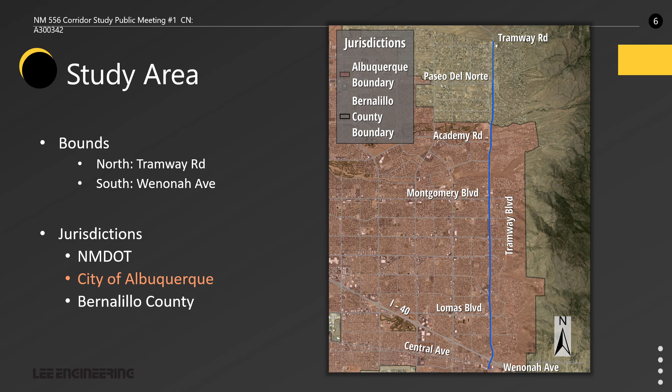So I'll be speaking tonight about the environmental clearance for the project. That's all driven by the National Environmental Policy Act, or NEPA, which is a very common acronym. So NEPA, in a very general sense, requires agencies to consider and then demonstrate and document that they ultimately identified a recommendation or a project that best avoids and minimizes environmental impacts and mitigates those impacts that cannot be avoided, while still meeting the need for a specific project. And it's defining that need for the Tramway corridor that we're here tonight to discuss.

So the general steps in the overall NEPA process are to initiate a study and develop a project purpose and need statement, then decide on a class of action. That could be a categorical exclusion, an environmental assessment, or an environmental impact statement. All three of those classes have a very similar level of environmental analysis that goes into them, but the level of documentation and processing differs among those, with a categorical exclusion being the most streamlined and an environmental impact statement being the most complex.

Then we complete all of the environmental analyses needed to identify all the environmental considerations and determine if there is an impact or not from the project and mitigate all of those concerns. And throughout the entire process, we will have a strong public involvement component, and we're initiating that process tonight. Ultimately, we get to a decision document, which is an authorization for a project to proceed to things like final design and construction.

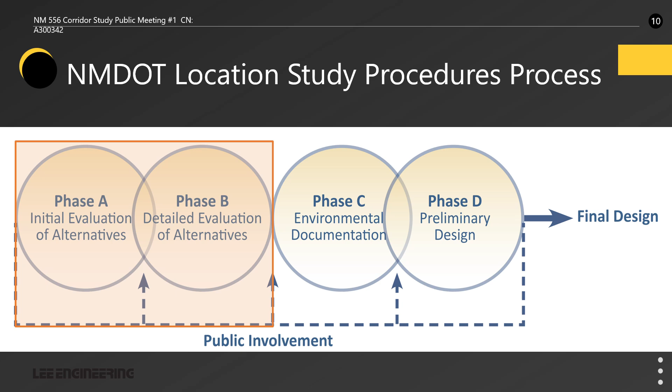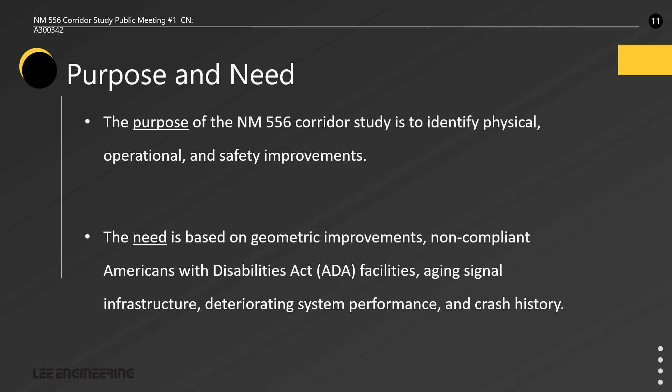The purpose for the New Mexico 556 corridor study is to identify physical, operational, and safety improvement needs. The needs are based on various geometric challenges at the intersections, non-compliant Americans with Disabilities Act facilities, aging signal infrastructure, deteriorating system performance. What we really mean by that is traffic, how difficult it is to get through an intersection during rush hour. And then of course crash history, which relates to safety throughout the corridor.

Looking ahead, after including the comments from this meeting, we will advance into alternative analyses, create a draft report late this winter. We will revisit this group with a public meeting, most likely early spring, and a final report to follow.

Now a bit on the study background. Tramway Boulevard has a rich history. It should be self-explanatory that the roadway started in the 50s and 60s as a planned access to the Sandia Peak Tram projects. At that point, it was a 2-lane road. In the 90s, it was widened to the 4-lane divided general layout that you see today. With that, the infrastructure is approaching 30 years old and has some opportunities to be improved. Also of note on the history of this corridor, in 2021, there were a few striping changes, mostly around the free right turns and acceleration lanes while entering Tramway from the side streets.

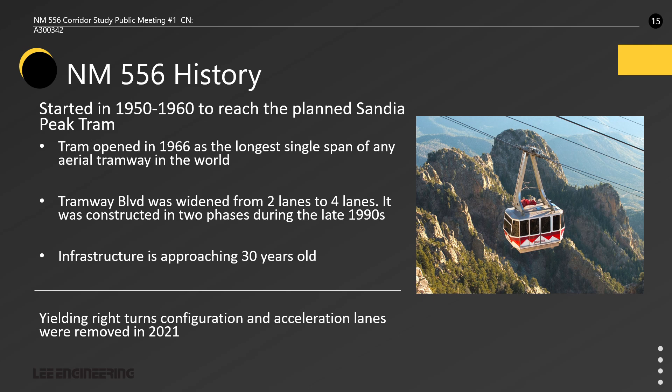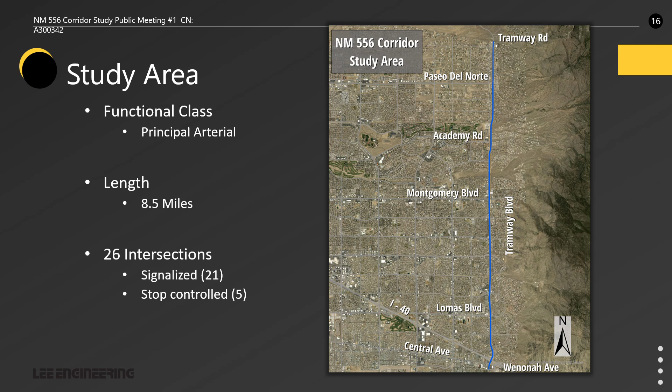Expanding on the study area, the functional class of this roadway is a principal arterial. Functional class ranges from local, think of your neighborhood streets, collectors, minor arterials, and then principal arterials. The major function of a principal arterial is to move traffic, and the secondary function is to provide the multimodal access to the communities. The corridor length is 8.5 miles. It contains 21 signalized intersections and 5 side street stop-controlled intersections.

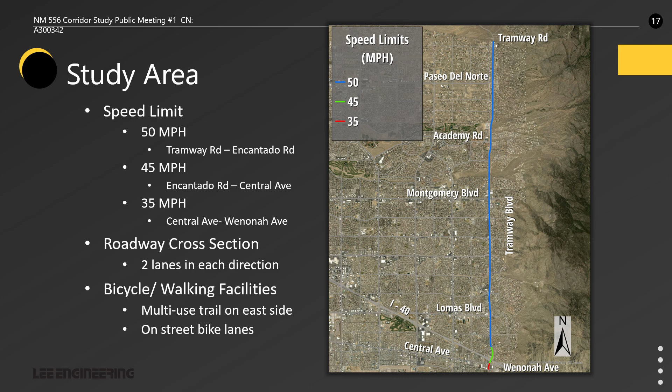The speed limit on the majority of the corridor is 50 miles an hour. On the south end of the corridor, towards Encantado and Central Avenue, it reduces to 45 miles an hour. South of Central Avenue, it reduces to 35 miles an hour. Again, there are 2 lanes in each direction. Important to note is there is a multi-use trail on the east side, limited pedestrian facilities on the west side. It does have on-street bike lanes and a large shoulder.

Diving further into the existing conditions, we'll talk about how we establish those existing conditions and what we found. We collected volume, speed, and classification data from several locations throughout the corridor. We collected turning movement counts at the signalized intersections. We completed the Road Safety Audit Day workshop with a multidisciplinary team. We looked at the most recent 5 years of crash data available. And with all of that, we looked at the capacity of the roadway and its ability to process traffic.

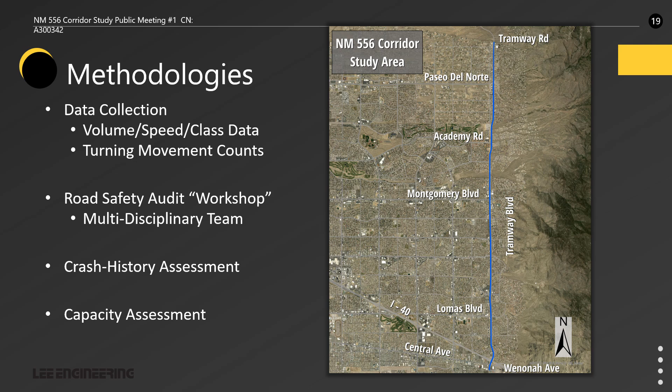The average daily traffic on Tramway Boulevard ranges from 6,500 to nearly 30,000 vehicles per day. The lowest volume segment is on the north end of the corridor, and the 2 highest volume segments are just south of Montgomery and the approach to Central Avenue and the interchanges. The truck percentage is 0.7 to 1.0. For reference, other principal arterials have truck percentages of 2.5 to 3.

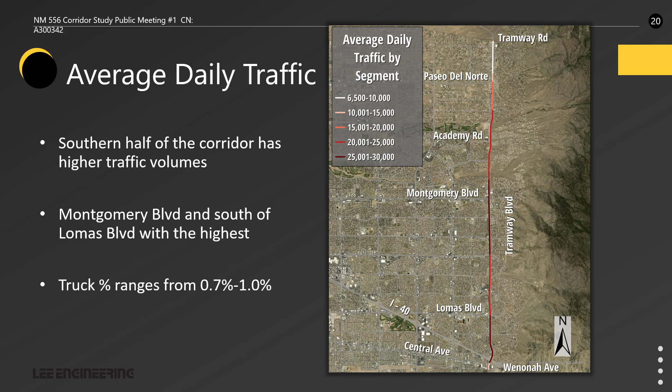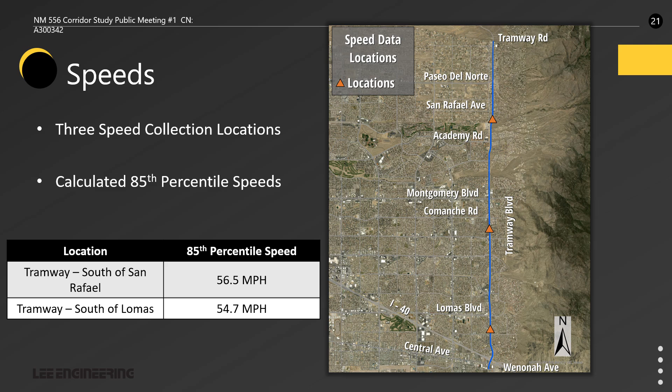Looking at the speed data that we collected, there were 3 locations, south of San Rafael, south of Comanche, and south of Lomas. The overall 85th percentile for San Rafael and Lomas centered around 55 miles per hour. That is to say that 85% of the traffic on the roadway is traveling below 56.5 miles per hour in the case of San Rafael.

Looking further into the speeds, San Rafael will be on the top, Lomas data will be on the bottom. The left figures show, in 5 mile per hour bins, the speed profile for the corridor. Again, you see the majority of the traffic traveling less than 51 to 56 miles per hour. Similarly with the Lomas locations.

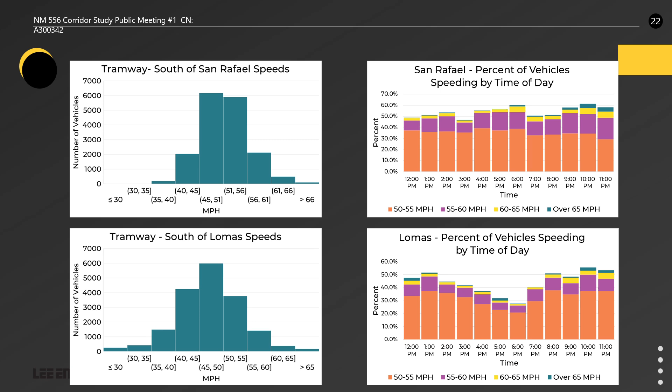On the right side, we have identified several bins of traffic that is exceeding the speed limit by time of day, this being noon on the left and midnight on the right. We can see through the greater presence of the turquoise that in the late hours, folks are traveling over 65 miles per hour with more frequency.

From the traffic data, we put that into our traffic models and we solicited traffic projections from the Mid-Region Council of Governments. When we look at the operations of the corridor, there were 8 intersections that experienced a level of service E or F. Level of service is a grade assigned to the performance of a movement or intersection that mimics a grade school scale, A being the best and F being the worst.

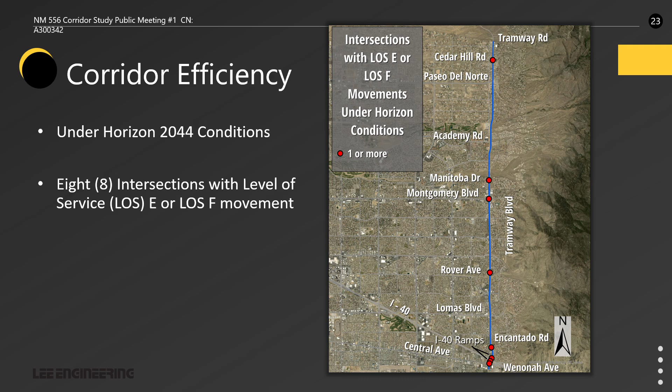A is a free flow condition with very, very limited factors that influence your driving. C and D are generally pretty congested, but traffic is able to move. And E and F describe situations where traffic is very heavy and you may have multiple cycles required to get through a traffic signal.

Stemming from that analysis, we also looked at queuing, the locations where the queues exceeded the available storage distance. You can see on the south end of the corridor, near Central and the interchange, there were several locations that exceeded the available queue storage area.

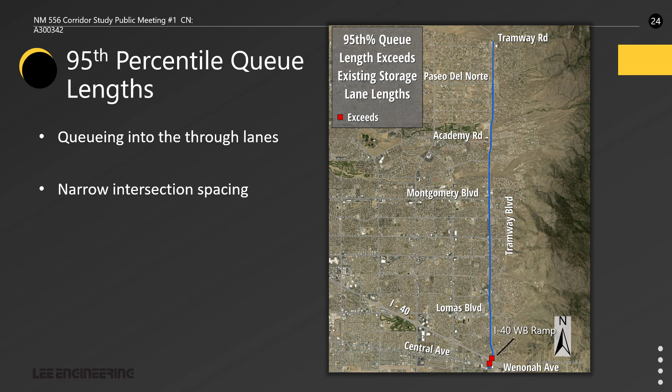Concurrently, while we collected the traffic volumes, we also collected pedestrian and bicycle volumes. What we see here on the left is the pedestrian volumes. The lighter shades are 1 to 30 pedestrians per day, and the darker shades exceed 100 and up to 140 pedestrians per day. The highest pedestrian volumes are located a majority of the north end of the corridor, with a bump again at Lomas.

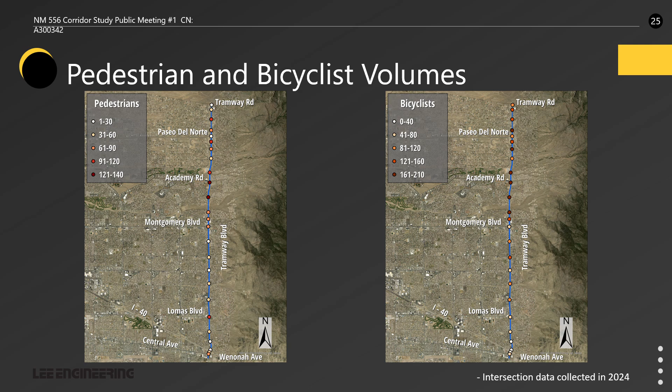When we look at the bicycles, using the same or similar scale, we see again that the majority of the cycle traffic is on the north end of the corridor, and some of that is limited to the south end.

As discussed, the project completed a road safety audit day. A road safety audit is a formal process developed by the FHWA, or Federal Highway Administration, to assess the safety on corridors or projects being constructed. It's a formal process, and what we did is take out one day, one event of that formal process and insert it into this project.

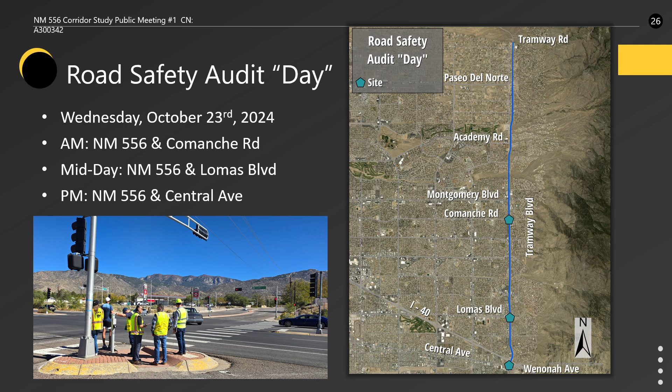To do that, we looked at the AM hours at Comanche, the midday hours at Lomas, and the PM peak hours at Central. We gathered the stakeholders, approximately a team of 20 folks that have operating and maintaining and ownership of the corridor. And as you see in the photo, we walked the intersections, we pressed the buttons, and analyzed the operations in the field. Those notes went back into this study and will help shape the projects moving forward.

One of the other major metrics we looked at was crashes throughout the corridor. We took a comprehensive crash analysis from 2018 to 2022 to better understand what types of crashes and what locations were experiencing high amounts of crashes throughout the entirety of the corridor. All of the crashes were categorized into 3 typical categories, and what you'll see is property damage, which means typically a rear end, fatal crashes, which means someone was deceased, and injury crashes in which someone was injured.

So in evaluating all of these crashes, we used what's called the predictive crash analysis for the 4-leg signalized intersections. And what this means is for every intersection, we're able to use all the inputs from the intersection. So how many lanes we have coming in, the average speeds of cars coming in, the types of grades, the traffic volumes for every intersection, and it tells us what the typical intersection should receive in crashes based on all those metrics.

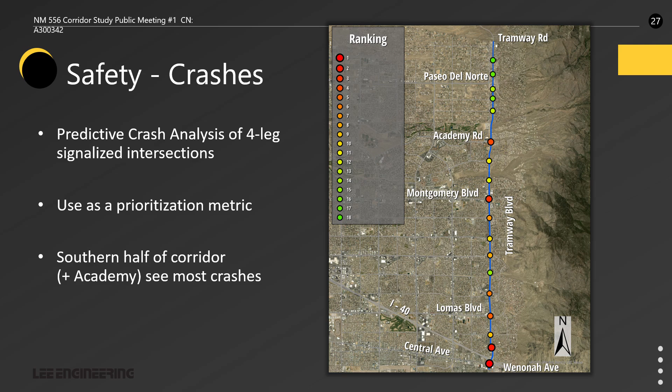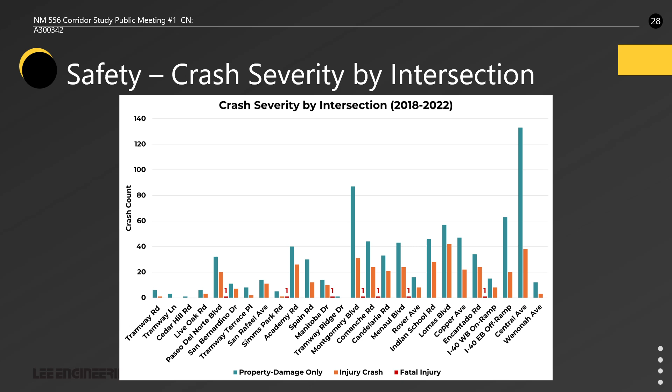And so this is a metric that kind of tells us that there's an issue with some of the pedestrian and bicycle conflicts and other issues that we want to take a further look into for the southern portion of the corridor. Not that we shouldn't be looking at this for the entirety of the project.

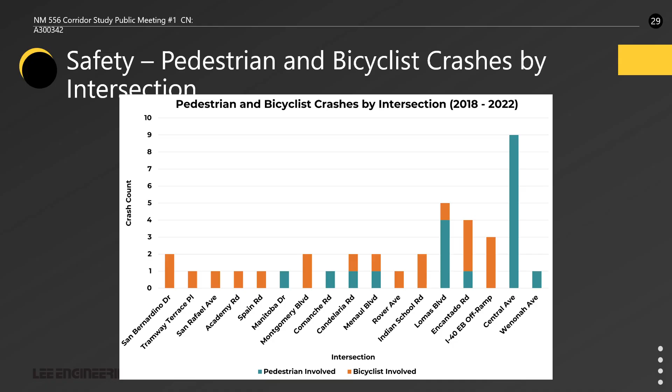We further analyze this data by taking a subset of the overall crash data and looking at one typical intersection. And so we chose the intersection of Montgomery and Tramway for a few reasons. One, this intersection operates as a typical intersection in terms of geometry as most of the other intersections within the project. And two, this was one of the worst performing intersections as it relates to the predictive crash analysis

for crashes at the intersection. And so what we did here was pull the actual police reports for this intersection to take a deeper dive into understanding what types of crashes are happening and where these crashes are occurring, to try and help us use a data-driven approach to understand what types of things we can implement to improve safety for all modes of traffic, but all crashes as well.

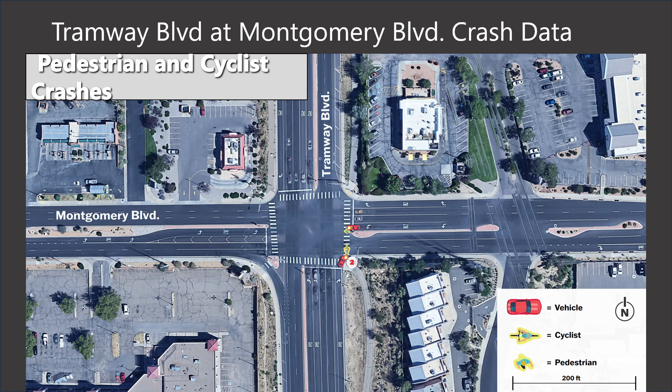All of this information will be used to really further evaluate how we can improve the safety of not only this intersection, but all of the intersections. And this was kind of a case study or further zoom in of the types of incidents we see corridor wide, and to kind of give us an indicator of what things to expect at the remainder of the intersections.

Shifting gears from some of the data-driven approaches, now we're going to take a look at some of the other corridor features that also have been identified for improvements. One of the first things that we see that makes this corridor a little bit different than other areas is that it was originally designed with free-flowing channelized right turns. In its original state, the right-turning vehicles, in this case eastbound to southbound, would have an acceleration lane where it would enter the traffic and then merge into the two existing lanes.

As traffic has grown, these operations have actually become a safety issue. One of the first things of this safety issue is that the right-of-way designation between the bike lane and this free-flowing vehicle is not clearly identified. And as the cycling traffic has increased, this situation has become more prominent and needs mitigation. This striping was redone in 2021 so that the vehicles using the right turn should yield before entering the traffic.

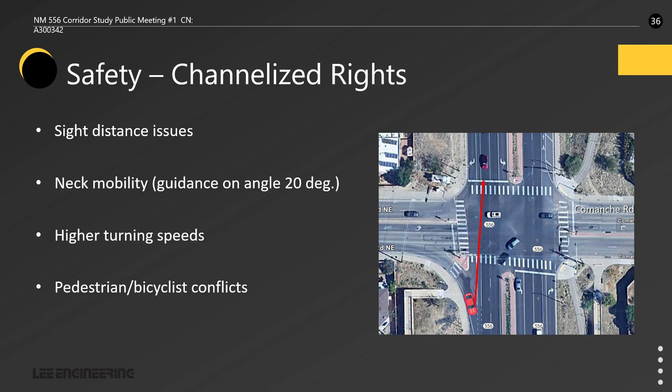Additionally, this turning movement causes other conflicts with driver abilities. Many parts of our population have neck mobility issues. As you see in the figure below, the vehicle is trying to look over their shoulder to find a gap. The guidance is to have that angle less than 20 degrees. You see here that it's more than 90 degrees, and it can be straining on folks. Additionally, these types of maneuvers are higher speeds, and again, they have challenges with pedestrian and bicycle conflicts.

On the other side of the intersection, the original Tramway Boulevard had acceleration lanes. In this case, not a free right, but once the vehicle would make that turn, they had some space to accelerate and merge into traffic. These lanes are no longer the preferred method, and thus this section was restriped to include a bike lane and a shoulder area marked off with chevron striping. What we did find in the field is that folks are still using this area as an acceleration lane, in conflict with the bicycle lane.

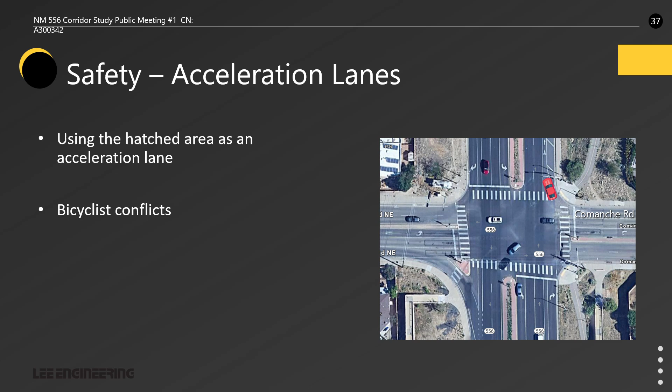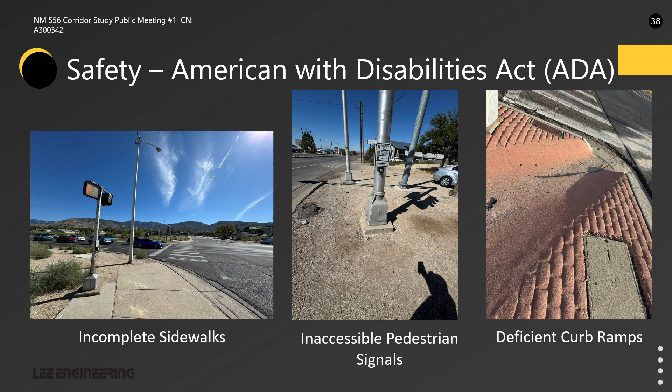As part of our inventory for the corridor, we examined the existing roadway and trail lighting. What we found was the lighting at the intersection proper was pretty non-existent, very limited activity. This is surprising, as this is the area where all the conflicts exist, and lighting does provide significant value for safety.

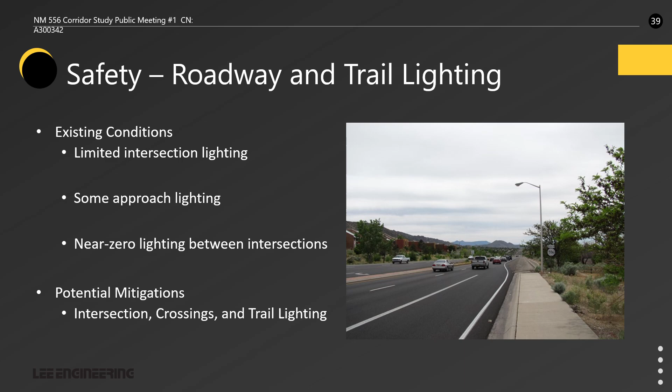We found that there are lights on the approaches to the intersection. The left turn and right turn lanes do have approach lighting, but it's really isolated to those areas. We found that there is near zero lighting between the intersections or between these approach areas. Additionally, one of the conversations that we're going to have is whether lighting should also be provided on the trails.

Looking at some of the other safety mitigations we can make for this corridor, one of the most prominent areas for improvement is the traffic signal infrastructure. As we described, it is aging, and there are several things and standards that have been updated and are now best practices. The ones that you can see here in this photo are the current guidance asks for 2 signals or 1 signal per lane over the roadway. So in this case, you only have 1 traffic signal indicator over the roadway, and it's almost over the bike lane more than it is the traffic.

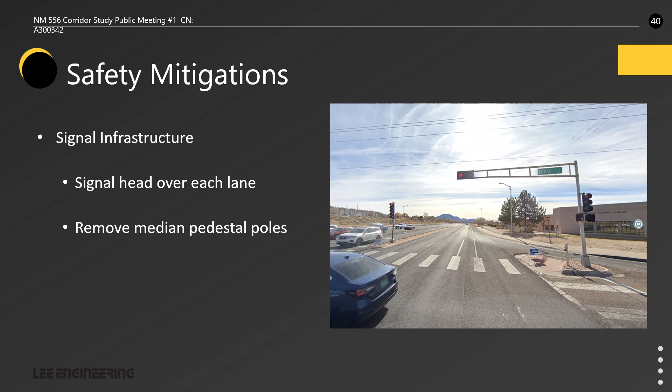Additionally, this location has a median mounted left turn signal. The new standards require that to be up in the air for better visibility and safety. Diving further into some safety improvements and building on the aging infrastructure, there are a lot of opportunities to modernize and impact efficiency and safety.

One of the most prominent, and you may have seen these around the city of Albuquerque already, is the flashing yellow arrow. This flashing yellow arrow phase serves very much like a green ball, where you're allowed to take the left turn if there's a large enough gap in traffic for you to make that left turn. The flashing yellow arrow does use the amber color to imply caution, and by flashing, it does allow for that movement to be made should there be enough time to make a safe maneuver.

One of the biggest features that this can do is allow us to do this by time of day. In that way, when traffic is busy, we can use the green arrow, a protected arrow, to protect the left turns when there aren't very many gaps or the traffic is very heavy. Then when traffic is not heavy, we can use the flashing yellow arrow to allow that permissive left turn and better react to the traffic that's present.

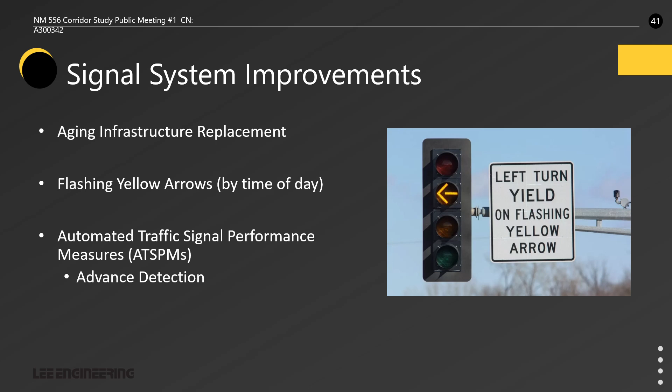In the automated traffic signal performance measures procedures, that data is being collected every day, and it will document the number of times the pedestrian button is pushed, the number of times an emergency vehicle requests preemption through the intersection, and on down the line. And with that data, again, the traffic engineers can make better data-driven decisions on operations and safety.

Digging even further, there are more techniques that we can use to improve safety for the corridor. Pedestrian Protect is a feature where we can leverage the flashing yellow arrows and the ability to turn the flashing yellow arrow on and off. In a Ped Protect scenario, when the pedestrian button is pressed, we would require that the next phase of the traffic signal only use the green arrow, thereby separating the pedestrian crossing and the traffic signal left turn movement in time.

If we look at the left turn pedestrian indicator, that is an option that basically addresses the same challenge, but when the pedestrian button is pressed, it alerts the driver that there may be a pedestrian on the crossing that he or she is about to cross. So it gives that driver an indication that, yes, please look to the left and see if there's a conflicting pedestrian in that area.

Other things that can be done through the traffic signal systems are no right turn on red and the implementation of leading pedestrian intervals. The leading pedestrian interval is a period of time before the green where pedestrians are allowed to enter the roadway, declare their space, and be seen by traffic as they begin their green movement.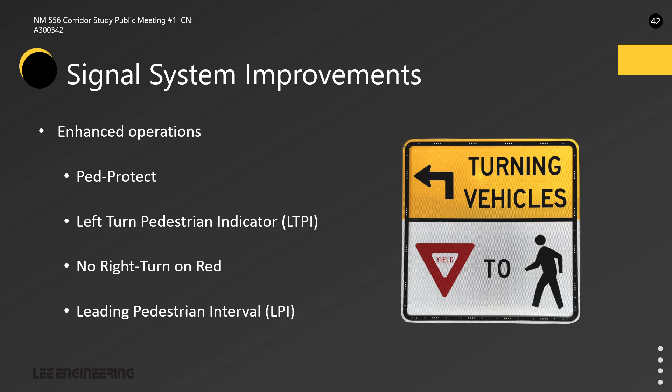Additionally, we've examined the geometry of the Tramway Boulevard corridor. Many of the intersections are similarly designed, and therefore these improvements can be used over and over throughout the corridor. We are ensuring that the turn bay lengths are long enough to hold the predicted queues. We are looking at the turning radii to make sure that they are up to the current standard.

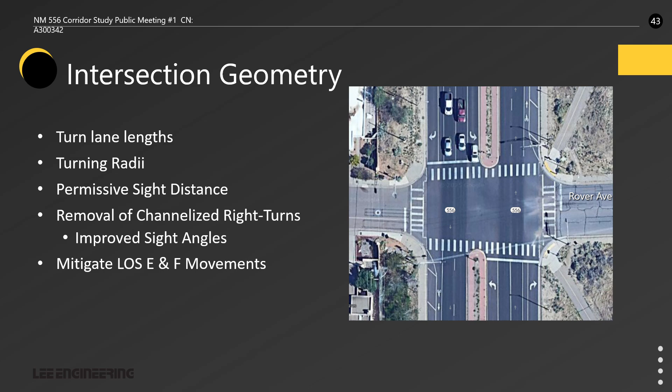We are looking at the permissive sight distance so that we ensure that a vehicle turning on a green ball, or if improved, a flashing yellow arrow, has the distance required to be seen and see conflicting traffic. We are looking to remove channelized right turns, pulling those movements into the intersection and making safer pedestrian and cyclist crossings. That will also improve the sight angles and, as we talked about earlier, minimize the over-the-shoulder merges. And as typical, we would mitigate the level of service E and F movements predicted now and in the future.

Stepping towards our multimodal and complete streets part of the project, we are looking to enhance the Americans with Disabilities Act compliance at all crossings. So there's quite a few throughout the corridor and lots of opportunities to improve those. One of the things that we have identified is the trail on the west side could also add value. You see in the top left of this photo, there is a dirt path where it shows the desire of pedestrians to use a facility on the west side of the corridor.

Additionally, one of the unfortunate incidents in our crash data was earlier this year, where a pedestrian walking southbound on the shoulder was hit. And one could imagine that having facilities separated from the roadway and the shoulder could help make that a safer action.

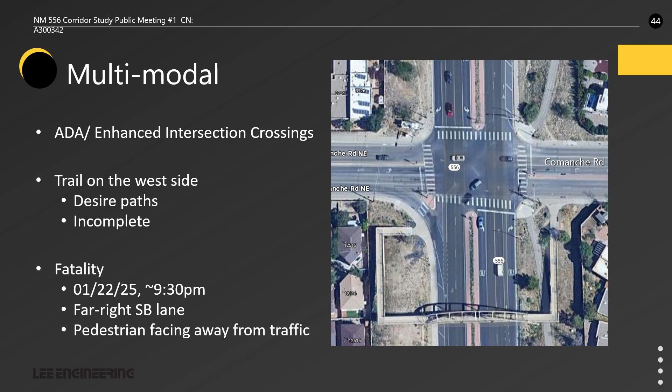In summary, we have identified these major parts of the corridor. The first one being speed compliance. We see that the 85th percentile is at or above 5 miles over the speed limit. In addition, we saw many vehicles traveling upwards of 15 or more over the speed limit. These concerns are directly related to some of the citizens' concerns about noise and nuisance driving. There is a tendency for drag racing, speeding, in excess of 20, 30, 40 miles an hour over the speed limit.

Additionally, we have identified several areas where the corridor performance can be improved. Most of these lie in the south, down towards Central and the interchange. We are looking to improve the level of service and the queuing areas. Throughout the corridor, we'll be improving the multimodal compliance and connections, looking for those opportunities where we can make better use of the corridor to provide multimodal connections.

Resulting from our crash mitigation, we saw that left turns were the most severe crashes, and we have an opportunity to use some of these signal system improvements to make improvements in this area. The left turn flashing arrow can do that. Additionally, the rear ends were the most frequent crashes. Using two overhead traffic signals can improve safety in that area, as well as improve safety for red light running crashes. Throughout the corridor, we'll be looking to improve bicycle and pedestrian conflicts.